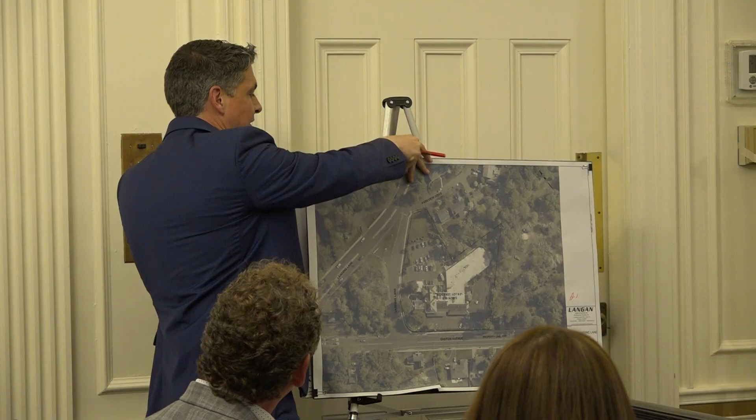So I'm going to move to accepting the exhibit I'll mark as A2, entitled Parker at Landing Lane Plan Rendering, again with today's date. It's really a colored version of the site layout plan submitted as part of our site plan application package. The applicant is proposing to construct a multi-story building containing 109 independent living units, 30 assisted living units, and 32 memory care units, as well as structured parking.

In total, the building will be 14 stories, 2 of which will be reserved for structured parking. The building will have a footprint of approximately 39,610 square feet, providing 416,300 gross square feet in total.

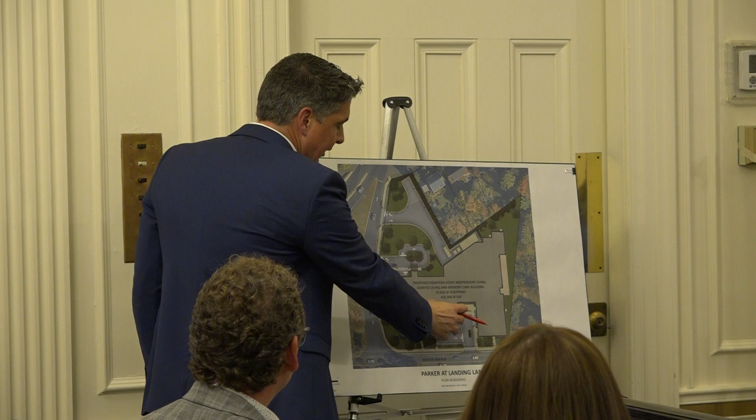Site access to the property will be provided off Easton Avenue as well as Landing Lane. Both areas provide access to the structured parking and have drop-off areas as well. One change from existing conditions is that we're providing vehicular movements through the garage, meaning if you enter from Easton Avenue, you now have the capability to leave via Landing Lane, and vice versa, with circulation within the structured parking area allowing for that.

Lastly, we're proposing new pedestrian sidewalks along Landing Lane as well as on Easton Avenue. From an overall parking compliance perspective, the redevelopment plan requires 1 parking stall per independent living unit, 0.5 spaces for each assisted living unit, plus 45 spaces for employees and 40 for visitors. Based on the unit mix provided, 209 parking stalls are required, and the application complies by providing 209 stalls. We're also meeting requirements for ADA parking as well as EV parking requirements.

I should note too, with the visitor stalls, those will also be readily available for motorists coming into the site. They won't be behind any type of security gate, so there'll be no queuing. If you're a visitor, you go directly to parking with no restrictions.

Loading and trash operations are going to be provided in a dedicated loading area, accessible off of Landing Lane. The loading area is designed to allow all turning movements to be done on the property, and most importantly, we're not trying to back in any vehicles off of Landing Lane. All those movements will be done on site. The loading area has been designed to handle WB40 tractor trailers, which have a trailer length around 33 feet, so not WB67s with 53-foot trailers. This is more of a mid-sized delivery vehicle.

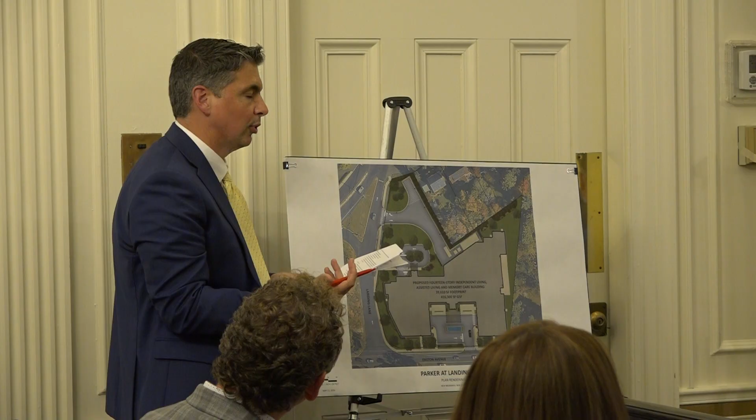Utilities are pretty straightforward - typical players in New Brunswick. The city will be providing water and sewer service, and PSE&G will be providing electric and gas service. I will note though that we are proposing a generator at the northeast corner of the building. That generator will have an enclosure around it to make sure we're meeting both the state and city noise requirements.

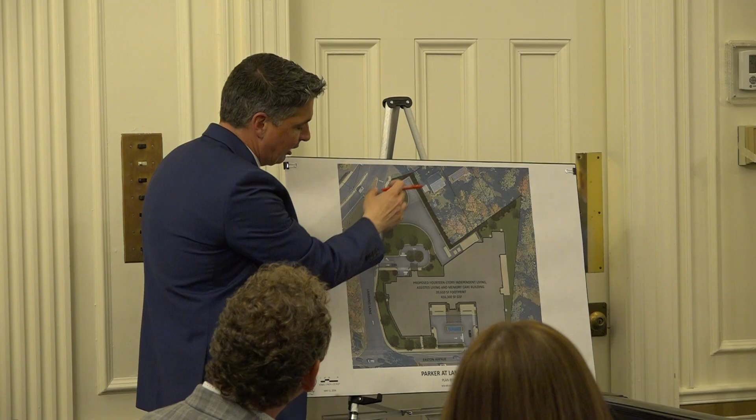Landscaping - we are proposing 100 new trees along with 228 new shrubs. The vast majority of the landscaping is focused around the site perimeter between the proposed building and existing residential uses, as well as new street trees along Landing Lane and Easton Avenue. We did respond to one of the planning and engineering comments: if there's a shortfall in the amount of new landscaping compared to the tree removal calculations, any deficit would be made up through a contribution to the city's tree fund.

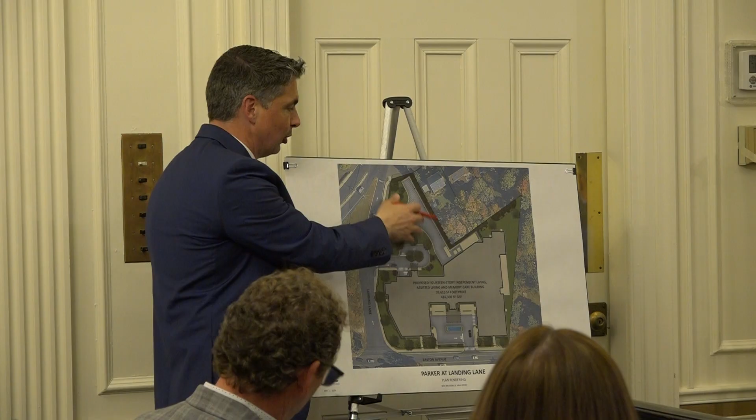Site lighting is fully compliant with the redevelopment plan. We're proposing to hit the required lighting levels through 12-foot high poles rather than typical larger poles. The reason for the 12-foot poles is to make sure we don't have any additional spillover - and I shouldn't say try, we will not have any additional spillover onto any of the adjacent properties using the 12-foot high light fixtures.

So I had the opportunity to do what I'll call a community workshop meeting, probably around 18 months ago, to meet with some of the neighbors. I have had detailed discussions with Ann, the property owner closest to the site development, and we did agree on a few things. Ann has reviewed our latest plans, and she's certainly welcome if I misstate anything to chime in.

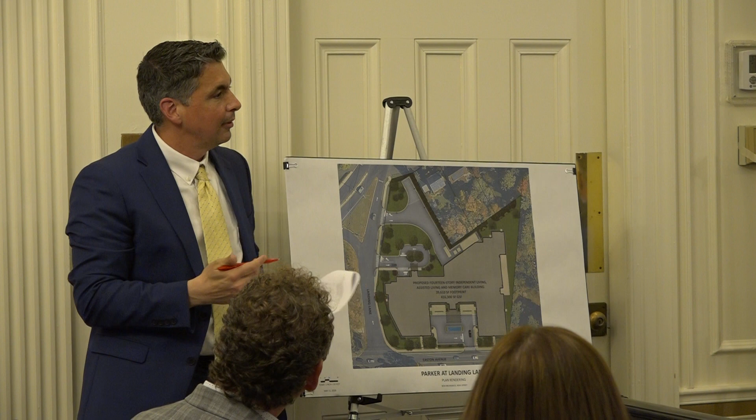What we agreed to specifically was - we had proposed some Green Giant arborvitaes, and Ann asked if she could make some of those plant selections. It'll be something similar; we have no objection to working with the neighbor on those plant selections. We also agreed to coordinate the fence color. I think I called out bright white, which was, I'll say, less than desirable from Ann's perspective, so we agreed to go with a more neutral color that Ann will dictate to us.

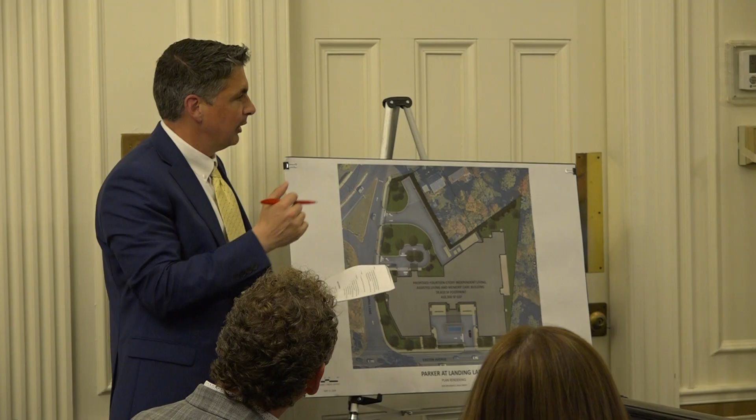We agreed to meet all applicable noise requirements. As a condition of approval, we're certainly willing to submit an acoustic study showing that we meet the applicable noise requirements.

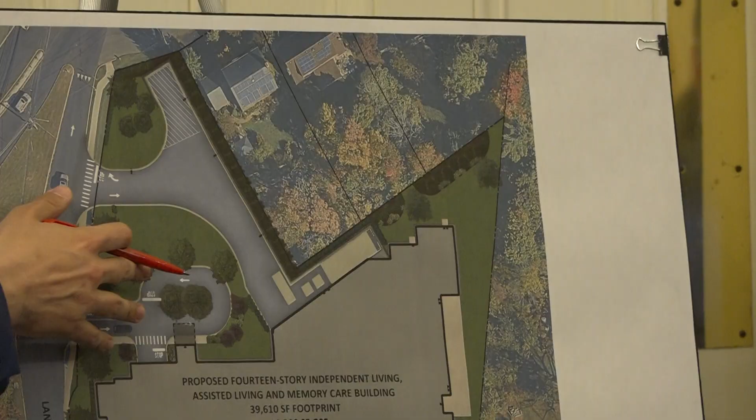And then lastly, there's a bit of a unique situation with the drainage in place right now. There's a pipe system that comes from the park, and when it reaches the two adjacent residential properties, it opens up into a ditch and then enters a pipe system again. There was a request to potentially fill this ditch to allow for more usable backyard space. The applicant has no problem filling that ditch as long as there aren't significant NJDEP permits associated with it, which I don't think there will be because the ditch drains less than 50 acres. It's been rerouted previously, but again, the applicant has no problem doing that for the neighbors.

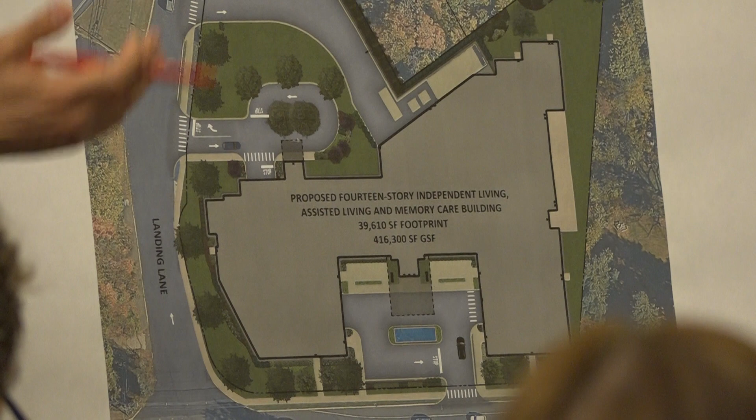Last thing I have, Mr. Kelso, is that we did review the engineering and planning letters. Jamie and I had a conversation earlier this week - we have no objection to complying with any comments in those letters.

I have no questions for Chris, if the board wishes to direct questions. Any member of the board professional, any questions?

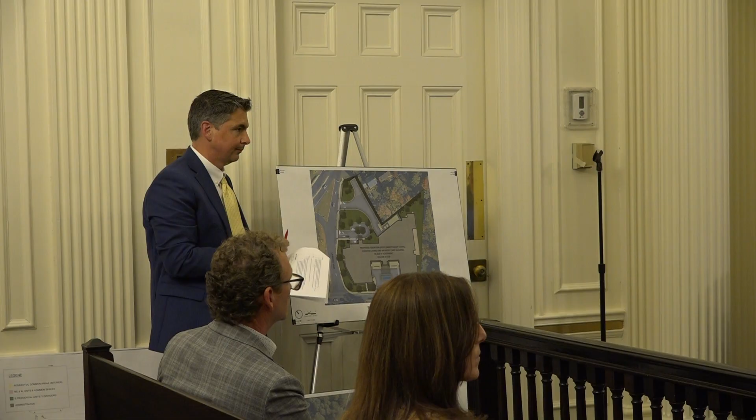Just a quick one, Mr. Roach. Do you anticipate that you comply in terms of parking, you're 100% compliant? Realistically, do you anticipate that all of the residents will be parking in the parking structure on the site? There's no possibility of street parking? Agreed, I'm sure everyone's been around there. That was my question. My follow-up was, is there a process to assign parking spaces to units?

Mr. Chair, too, if I may, just one other item that was testified to: because you have a backup generator relatively close to residential properties, you might want to get some testimony on when it's going to be tested, for how long, and what that's going to sound like, so that the inconvenience to neighbors is minimal in terms of when and how long it's going to run. We'll provide testimony through that. Okay, thank you.

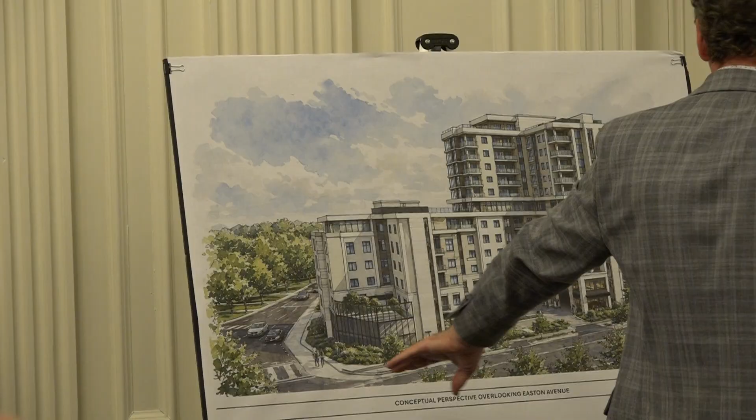And that's submitted with the city. The tower is about 172 feet in height.

The first floor, facing Easton, is the entry to the lifestyle, independent living. This level has a lot of the community spaces for the residents, with the entry, reception area, administrative area, a coffee shop, and other common spaces that the entire home would be able to use.

With mail and marketing offices. On the next floor, floor 2, that houses some of the memory care. There are actually 2 floors, the second and third, that stack, with an outdoor memory garden for the residents that's secured. Off to the right is the dining room for independent living, which also has an auditorium and other support spaces.

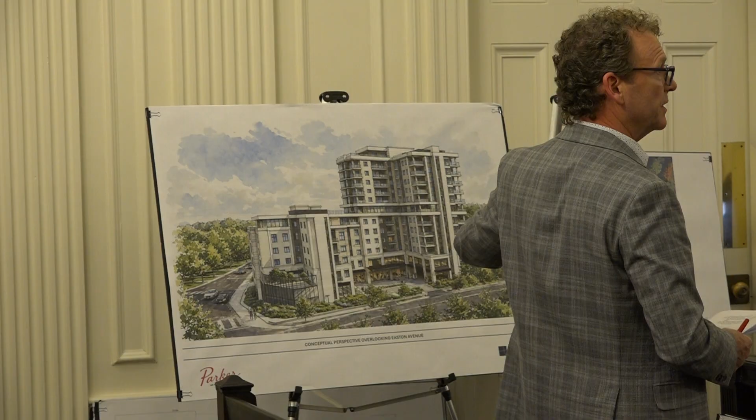Some community spaces for them as well. The next floor, half of it is memory care, and pretty much in this zone of the building is the healthcare, the memory care assisted living. All the way up to the 6th floor, that's where the independent living starts. I'll show you in the floor plan how you move vertically through the building.

Then on the 7th floor is the wellness floor. Half of it is wellness and some more independent living that overlooks the park. Then moving from the 7th floor all the way up to the top floor, the 12th floor, is all independent living. And the very top is an amenity space, with some dining and more activity spaces for pretty much anybody to enjoy in the community.

I'm going to turn to the next rendering, which is A4. I'll label that A4.

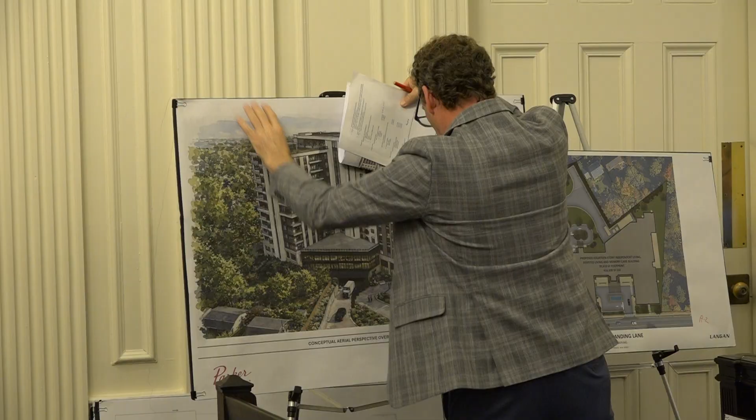This is the landing lane. You heard Chris mention earlier the service area in the back. Not only is the service area protected by this retaining wall and all the shrubbery and evergreens we're going to put in, it is also shielded by another row of landscape that allows the entry into the healthcare, which would be the assisted living and memory care entry.

So because of the grade change between Landing Lane and Easton, it laid out a nice secured entry point in the back for staff and visitors coming into the healthcare building, coming up through an elevator in the center of the building, and then the independent living on Easton Avenue. So we're using that grade change to distinguish the 2 entry points.

There's an entry into the parking garage here, and on Landing Lane there was also an entry in the back that I didn't point out, but you can get in from both the back and the front into the building from a secured parking garage.

Again, down here is the assisted living memory care entry, and right here is the first floor. We're one floor down, so that's the entry on the independent living side, which then you come up to these floors, which is assisted living, and these two floors, memory care. Then this is that first floor of independent living that comes across.

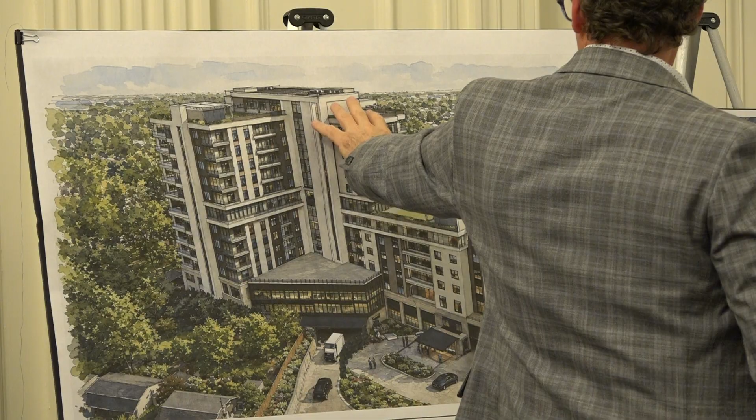And this is the top amenity deck on the very back here. We've got some mechanical equipment that we're going to be shielding with louvers and things on this floor, as well as down here, you can kind of see where we're hiding some of that. I'm going to go to the last rendering. I'll mark that as exhibit A5.

This is the overlook of the park that's literally looking downtown. And the park is right here in the foreground. You can just see up here on the second floor, which is where the dining room is.

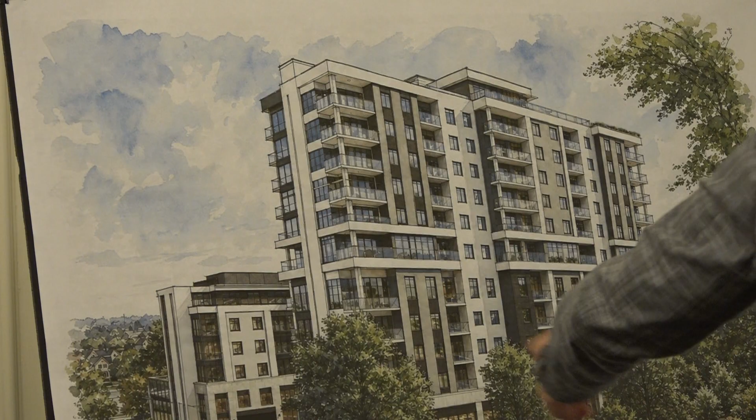And then you've got independent living in this zone. And again, some of the facade here has a lot of large glazing overlooking the park. We've also taken some end zones here to give it some architectural character, knowing that it's really the front door coming into the city.

So we've got a mixture of precast stone that we're using. We're also looking at some metal panel, just to give you some ideas of the character. We haven't worked that all out, so it needs to have very durable materials, being a high rise. A lot of the units have balconies. Right now we're looking at a variety of, whether it's aluminum or some glazing for maybe the top, but we haven't worked out those details.

So we'll have a mixture of storefront windows, the colors being worked out right now as more of a light, so the building has more of a light character as a backdrop to the park and the city in general.

A lot of our concepts, you've heard words like facility. This is not a facility, this is the resident's home, so we come at it with a very residential feel, really designing from the inside out because of the care and the love that Parker puts into the community. So even down to the nurses station area, we like to say, I don't have a nurses station in my own home, so a lot of times we're designing the inside to be a living room environment. Very well appointed, not shiny wax floors, but something that's got a very residential hospitality feel to it, that you heard Beth talk about the lifestyle change from what's currently there.

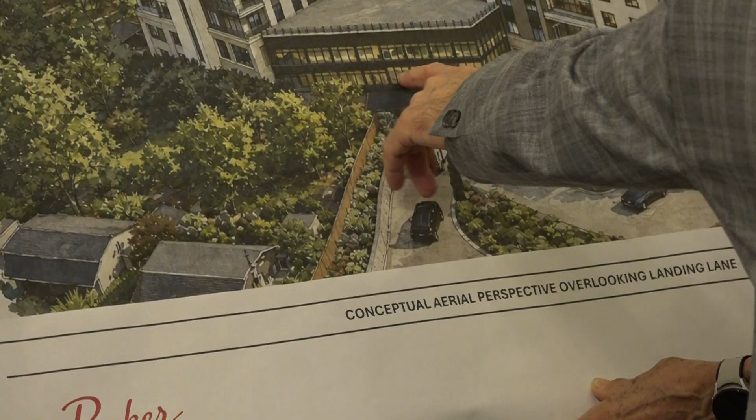I'm here, this is my house, right? So I'm looking at this, and this is lit up. Is this going to be all lit up all the time? No, some of it is during the day, there's office spaces back there, but they're more likely to be lit at night.

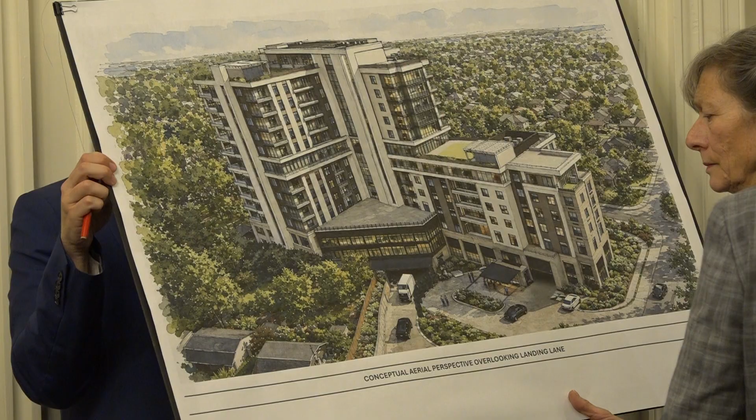This looks different, is this the same elevation, this and this? Or is this higher? It's the same thing, they're the same elevation.

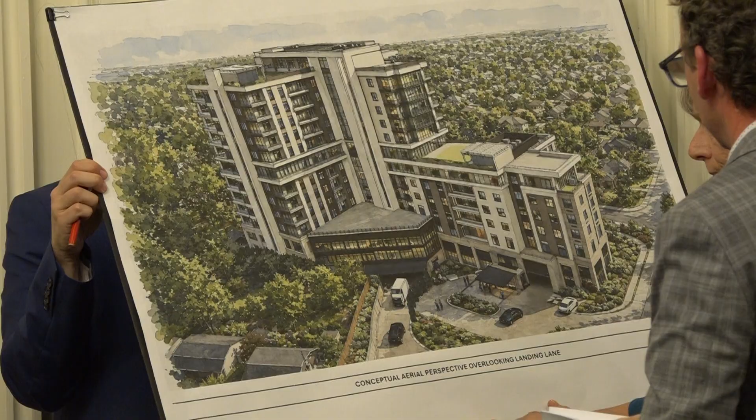So this is 1, 2, 3 stories behind me? From this lower level, from your house it'd be 2, because we're down a whole level. Great, okay, that was all.

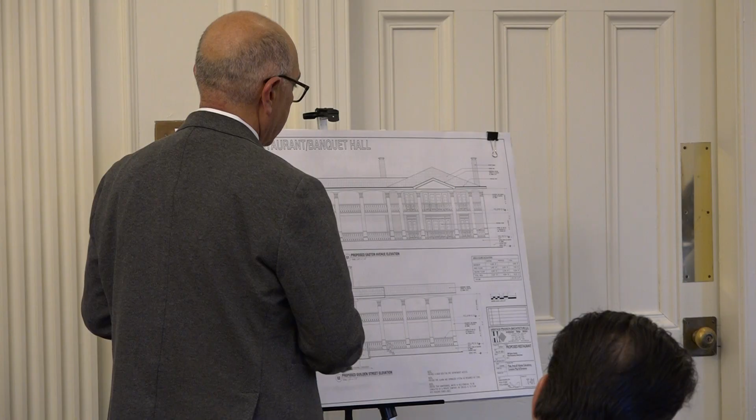And then we have some area calculations. As I mentioned, we are not changing the footprint and the indoor seating area. However, we are proposing to add outdoor seating.

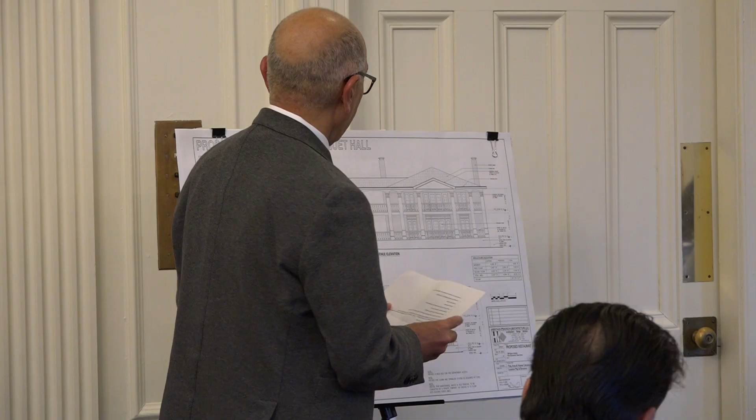What type of finish do we anticipate for the facade? Currently, the building is brick, so we intend to keep that. And then we add some stone finish, and the balusters will all be the classic stone look. Color scheme? Mostly probably earth tone colors.

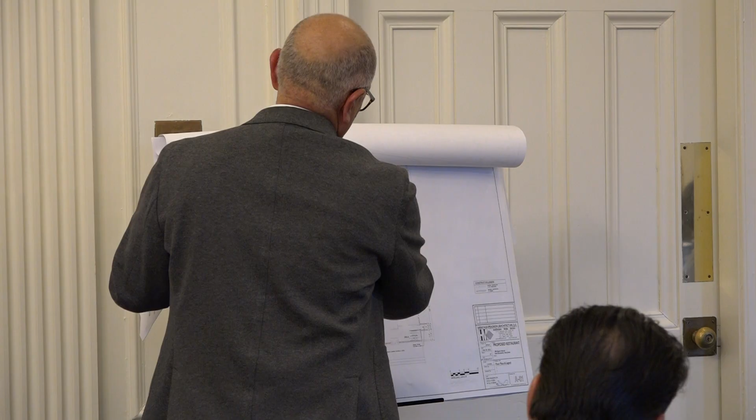And then the first floor would be all cleared. Before you move to the first, do we also have our mechanicals in the basement? Yes. Okay. And then the area on the garage is unexcavated. We have labeled it as unexcavated, so it's only the existing structure.

And then if we go up to the first floor, which is the lower portion, the drawing on the lower portion of sheet A01, most of the interior partitions are being demolished except for the structure. We have a steel structure, and then in between we have wood framing. So we are proposing to have an open space, clear open space, before we had some different assembly rooms, if you will.

And then to the left side, we are demolishing the 3-car garage doors. There's a ramp, there's a staircase. We're demolishing all these and raising the floor to provide one level for the entire first floor.

Chairman, these plans are exactly the same ones that were submitted with the application, so I haven't asked for them to be corrected. On A02, on the second floor, there was a residential unit, a very large residential unit. So again, the proposal is to demolish all the partitions there, the interior partitions, and also raise up the ceiling to have some sort of cathedral ceiling, just to provide a space.

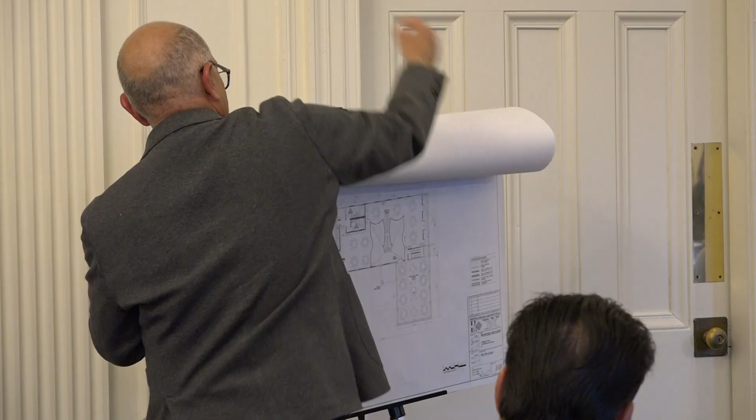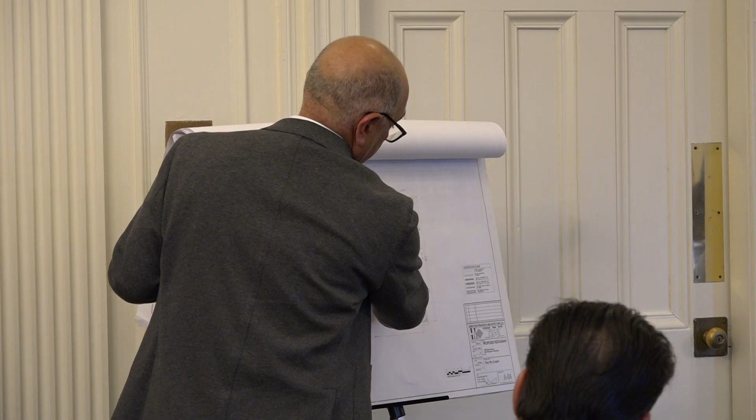So all this area on the second floor will be open, so there's no seating except for the perimeter of that area. We're also proposing to provide restrooms for both sexes, so they don't have to go up and down, and there's also an elevator that goes up between the two floors. Also on the second floor, we're proposing an outdoor seating area that will contain 76 seats.

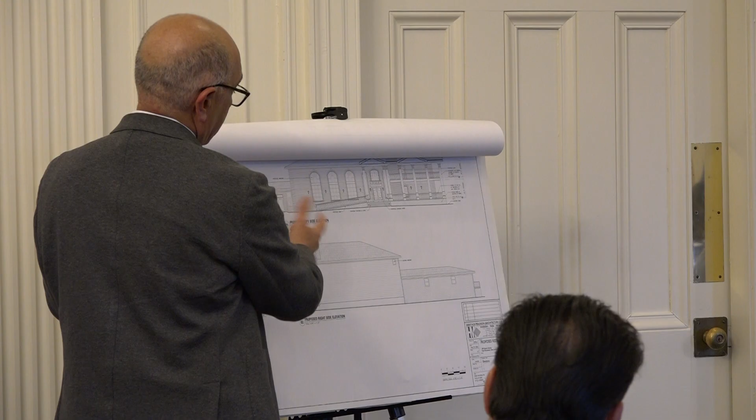Those arches are the garage doors that would be blocked. We're providing some overhead clerestory windows to provide natural light, and at the same time those will be solid decorative arches so they can have any kind of equipment, while still getting light from up above.

All right, that concludes his direct testimony. He's available. Any member of the board or professionals have a question?

Where exactly is the outdoor seating going? Because I'm trying to picture it, and I know that building well, so I'm just trying to figure out where that outdoor seating is being placed. It's taking a portion of the parking lot. If you enter on Easton Ave, the entrance of the building is on the right side, so as you enter from Easton Ave, it's on the right side, and it would extend outside.

I think it might be easier to visualize with the engineer's testimony. Okay, all right, yeah.

And will there be an ADA accessible ramp, or is it beyond? Yes, absolutely. Any other questions? Seeing none, next witness, please.

We'll move to the engineer. Thank you.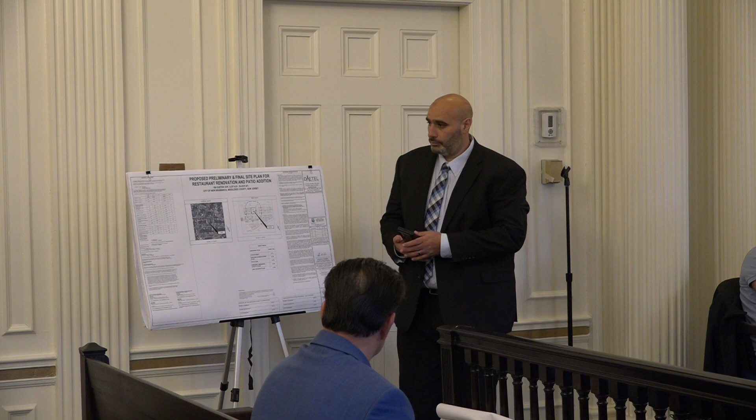Walker Luck is an expert in the field of engineering, Mr. Chairman. We'll accept him as an expert in engineering. Did you prepare the site plan drawings which are on that easel? Yes, I did. Tell the board the location and size of the property. Yes, so the size of the property is 0.746 acres.

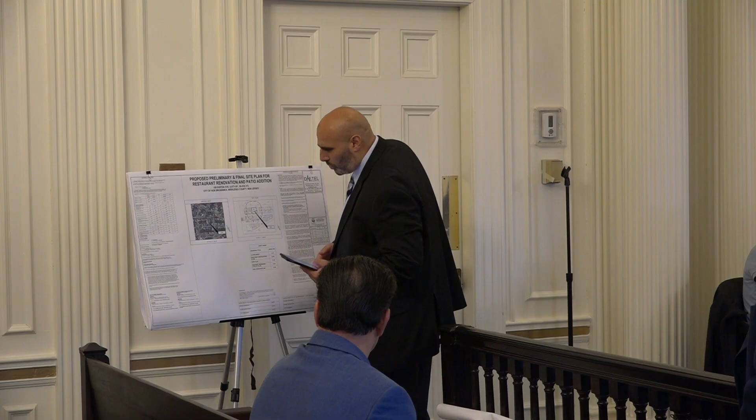The location of the site is on Easton. The back part of the site is on Gilpin Street, and the closest cross street is Bristol Street. The property is south of Easton Ave. And that 0.7 acres comes out to 32,500 square feet?

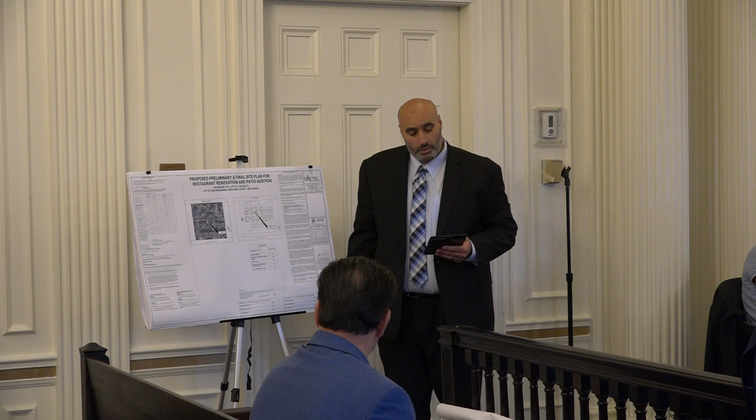Yes, that's correct. What is on the property today? Currently on the property is an existing funeral home with 55 existing parking spaces. And what does the applicant propose? The applicant is proposing, as the architect described, a restaurant with outdoor seating.

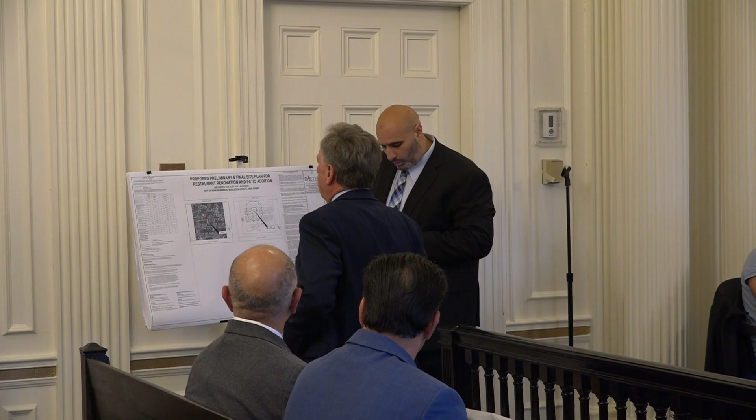All right, can you take the board through the site improvements that are being proposed? Certainly. I'll go through the bulk requirements first, just for the record. No change. We've already indicated we comply with just about everything. We've got one existing nonconforming condition, and we are requesting 3 variances. Okay, so I'm going to pass through existing conditions very quickly and then go to the site plan.

Go ahead. So on existing conditions, I just want to show the location of where that parking is going to be, for the chairman's benefit. So this is the existing parking lot. There are 2 curb cuts currently on Easton. We'll be closing one of the curb cuts, and at that curb cut is where the patio will be going. So there's one curb cut.

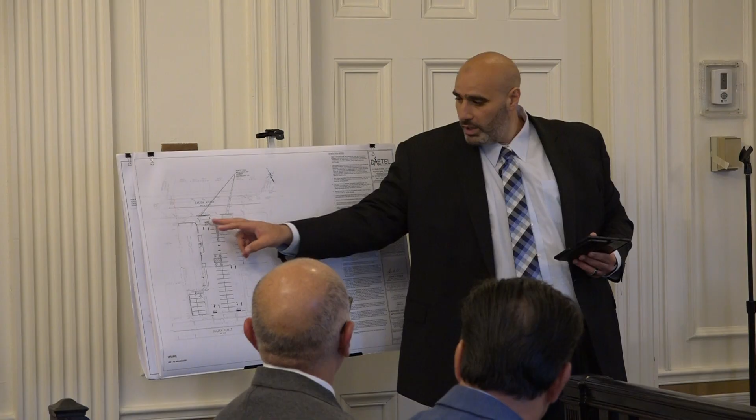We'll be relocating the curb cut to this other parking bay over here, eliminating that curb cut to provide a patio in front of the building, and then opening up another curb cut in this bay of parking. So that's just translating it to the existing conditions.

And the building, other than the modifications as per the architect, we're not doing any further expansion to the building. There's currently 55 parking spaces. We're going to be modifying and upgrading the spaces to make sure they're conforming with ADA and the new New Jersey DCA EV parking spaces.

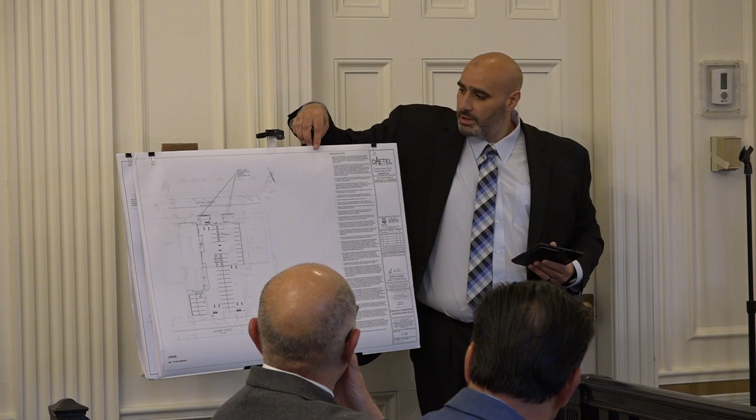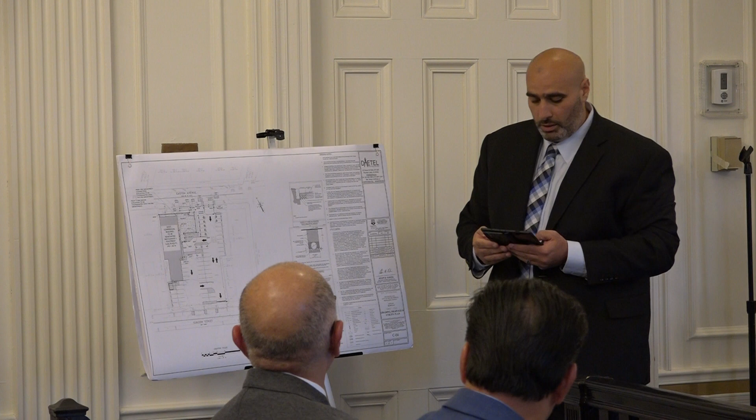Just going on to the site plan, going through the improvements. It's going to be coming in from Easton, one-way circulation coming from north. Let me go over there. So one-way parking coming from north to south, and you come in through the access curb cut on Easton, one-way circulation. You can come and drop off parking and continue out to park, and exit through the southeastern access drive. This exit on this drive is not going to be used for exiting.

That's going to be used for deliveries and emergency vehicles if needed. But the main course of circulation will be coming through this drive aisle and continuing down to the southeast portion of the site and exiting from that curb cut. Will there be an automatic gate with access control there at that gate?

The site, I just want to go to this one over here. This is the site plan which has been submitted with the documents. This is sheet C03 for reference. So we have one-way circulation.

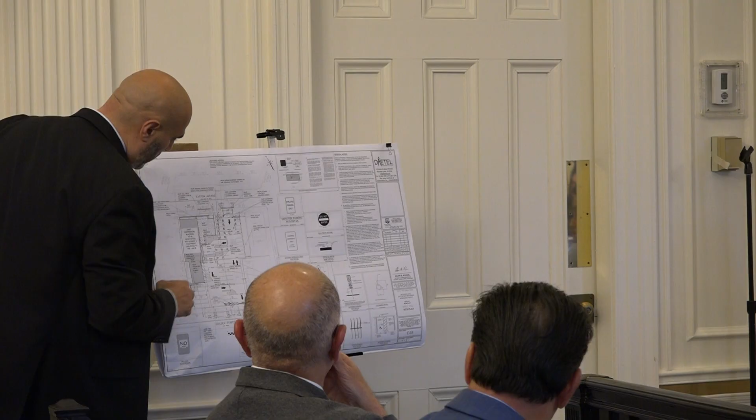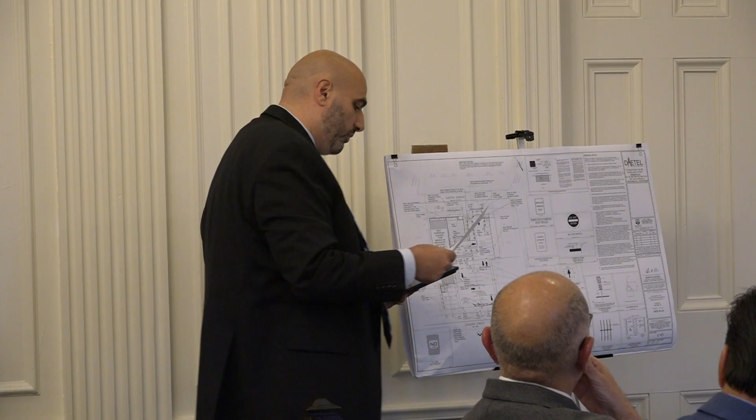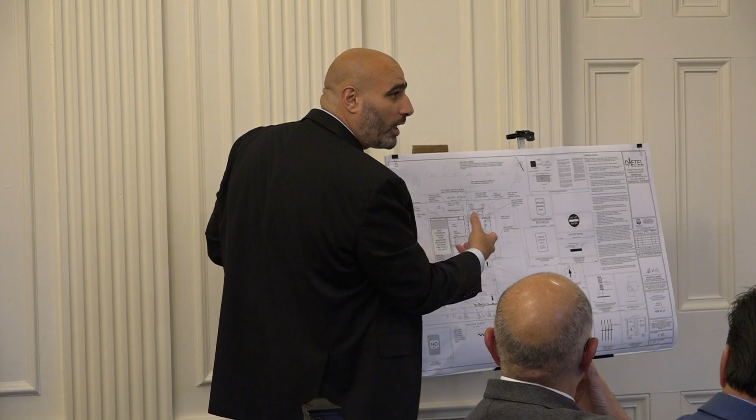We have conforming parking spaces throughout. We currently have a total of 52 proposed parking spaces, 7 of which are EV, 3 that are ADA, including 1 van accessible. In addition to that, we also have 9 on-street parking spaces along the frontage. So when we mark out the parking spots along the frontage, there's an additional 9. Although it's not included in the parking calculation, just noting that along our frontage there are 9 on-street parking spaces as well.

But on-site versus off-site parking spaces - on-site, there's a total of 52 parking spots.

Here, in this area, is our 10 by 14 trash enclosure, which will have both recycling and trash in there. And we're also providing, here's the patio area, and this is how it's integrated with the parking. So there's stairs over here, and there's an ADA parking ramp to allow ADA parking and ADA access to come up the ramp and into the building.

And here's the elevated patio with landscaping between the parking and the patio, and also additional landscaping on Guilden Ave, Guilden Street, sorry.

That's essentially it. You have some stacked parking for employees? Yes, so the stacked parking is over here also by the trash enclosure, that's stacked parking for employees. There'll be employees, it'll be known to everybody who's parking here.

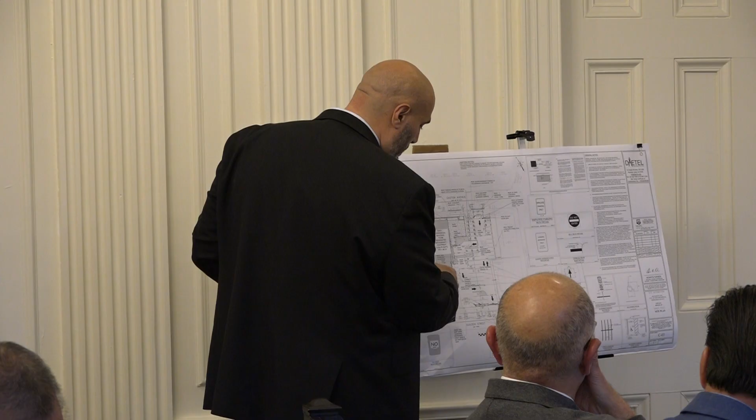As the owner testified to earlier, deliveries are going to be prior to the opening and operation of business hours. So they'll be dealt with prior to business hours.

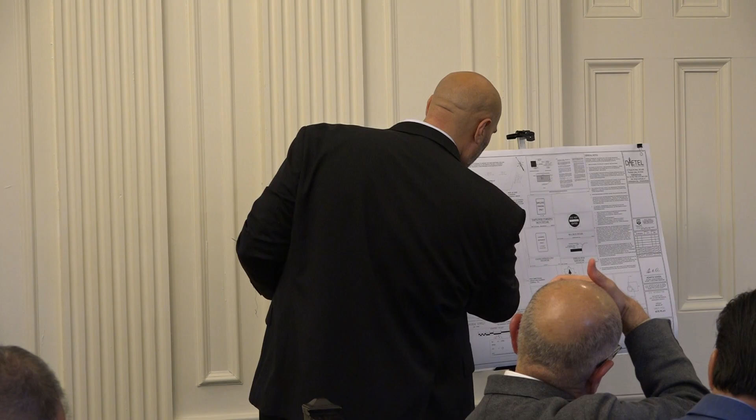Location of the sign? There's an existing sign here on Easton Ave, which will be modified to the sign that was circulated earlier.

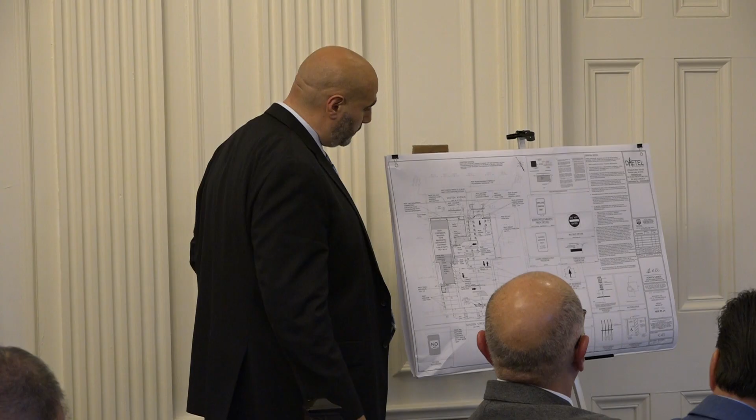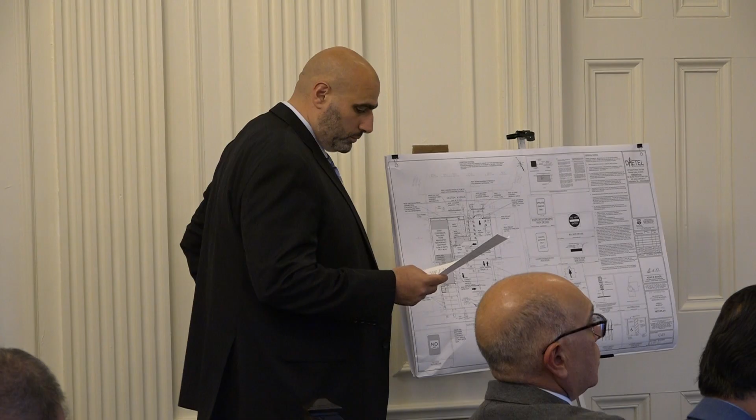Have you had an opportunity to review the city engineer's report? Yes, I did. Mr. Chairman, with your approval, I'm going to start on the middle of page 3 with the general comments and recommendations. Sure. We're only going to hit on the items that are still open and require discussion. Item number 2, can you respond to that?

Yeah, so item number 2, soil erosion and sediment control. We submitted on April 21st for soil erosion and sediment control. We did submit as part of our package, showing the limit of disturbance, which was one of the comments from engineering. That is reflected now in our current site plan package that was submitted, and that was submitted for approval on April 21st.

With regard to item number 3, I can tackle that, Mr. Chairman. We have obtained a letter from Delaware and Raritan Canal Commission indicating that it's an exempt application. Okay, thank you, and we'll provide that, obviously, to Dan.

Item 10? Yep, Adam? Yeah, item number 10.

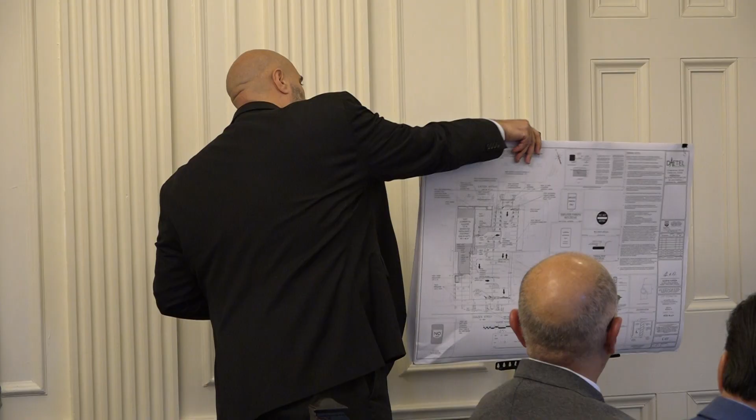So item number 10, we also did a survey looking at water and sewer, and I'm going to address both with this one. Turning to sheet C04, with regards to domestic water, we've evaluated with our building engineer and architecture team, and the domestic water is adequate for the building. But for sprinkler, we need one fire connection on Easton Ave.

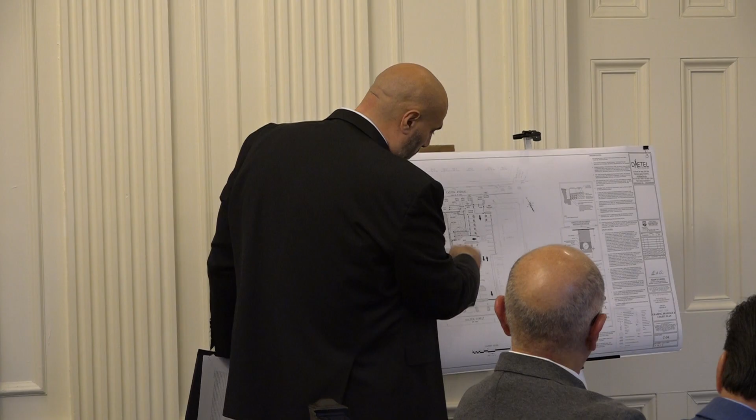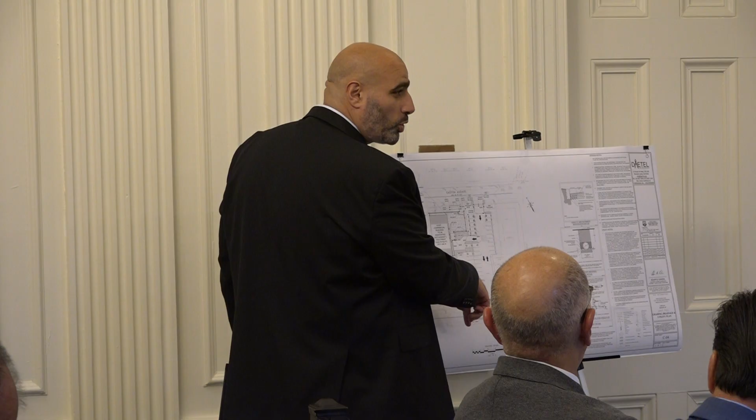With regards to sanitary, one of the engineering comments was to explore the 3-inch pipe in the back. That pipe has been demolished, but there's currently an existing 4-inch pipe that goes to Easton. Based on the new improvements in the building and new bathrooms in the kitchen, we need another line, which will be a 4-inch line. Rather than going to Easton, that will come on the low side of the buildings to Guilden Street on the back side. That's not currently reflected on our drawings, but we will be updating them.

All right, I think that testimony hit on items 11 and 13 as well. So that testimony covered items 10, 11, and 13. Obviously, if the city engineer wants more clarification, we can provide it.

We'll move on to the next page, item 15. They asked for the limits of disturbance to be delineated. It's on the Freehold soil plans, correct? Yes, it's part of the soil erosion and sediment control. It's on our plans, and the limit of disturbance is 7,872.90 square feet.

We've already hit upon item 21, the timing of pickups for trash and recycling will not pose any type of conflict with the use of those parking spaces.

Can you touch on the grading, drainage, and utility comments, please? Yes, so again, on our cover sheet we have our water and sewer demands. There is an increase in demands on both water and sewer. The water is adequate for what's there with regards to domestic. The sewer is also adequate, however, for operations and functionality in the area where there is the existing garage being renovated that doesn't have plumbing, so we'd be bringing a new 4-inch line to this section, again going down to Guilden Street. We'll also be providing an engineer's report for both water and sewer, stating that the last bit of information we were waiting for was clarification on that 3-inch pipe and the 4-inch, which we did get. So we'll be finalizing that report and submitting it as a resolution compliance condition.

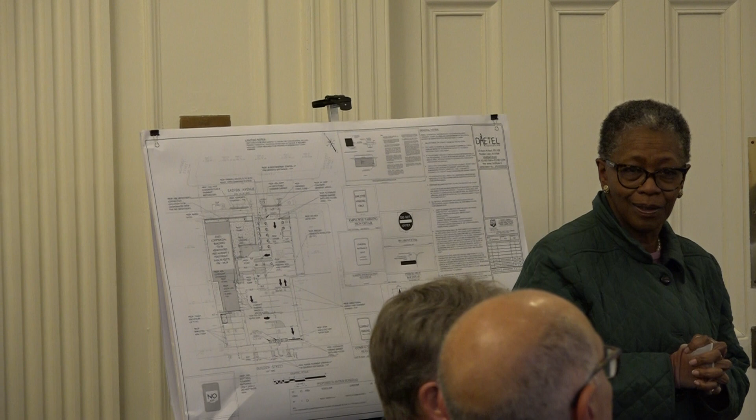Okay, will there be a liquor license? I didn't hear anything about alcohol beverages. No, sir, no liquor license. It's bring your own. It's gonna be bring your own.

And why would they need residential parking? They have 52 spaces. Well, they're foregoing it, they're waiving their rights to it, so they won't be—okay, yeah. How many of those 52 will be handicapped? Three. Okay, that's all my questions. All right, thank you.

Anyone else from the public have any questions or comments?